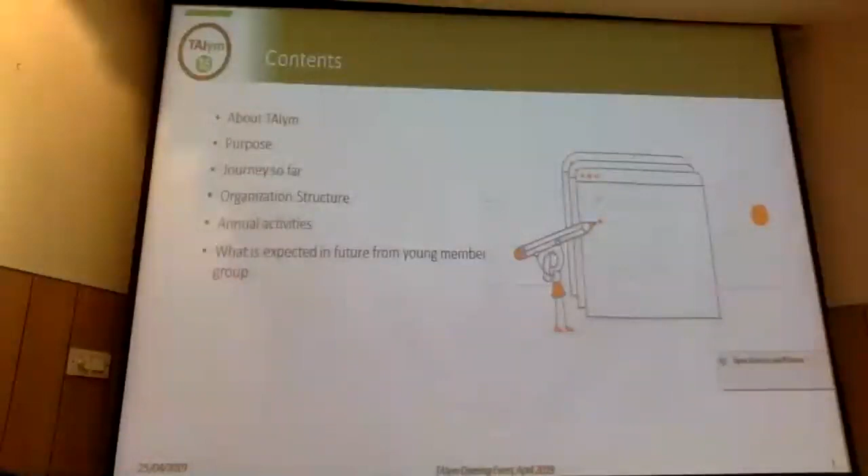In my presentation, I will talk about Tunneling Association of India Young Members Group, its purpose, its journey so far, the organization structure that this group will have, annual activities that we are planning, and what is expected in future from this young tunneling group.

TAIym is a child group of TAI. It's a platform for young professionals, be it engineers, consultants, clients, architects, manufacturers, vendors, or anybody associated with the tunneling field, up to the age of 35 years, working in the industry.

It works in close coordination with the International Tunneling Association and the Young Members Group of the International Tunneling Association. Young members are already making international presence—as far as I know, there are 3 papers from India being presented at the World Tunnel Conference 2019 in Italy this year.

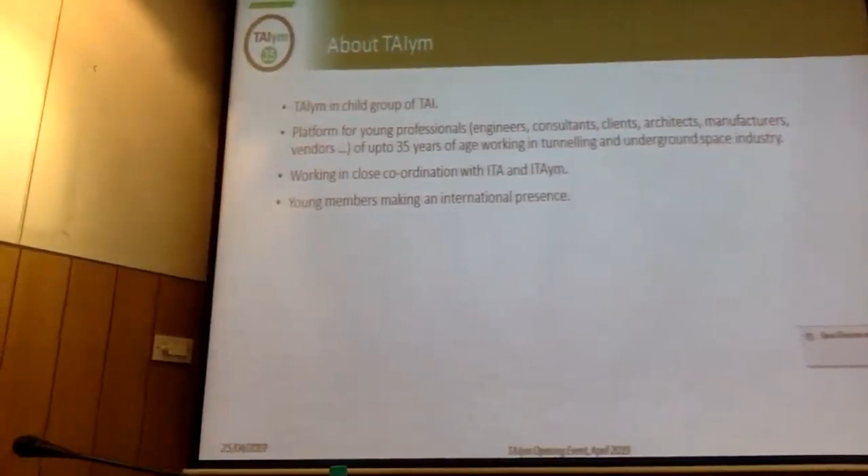Two are from Delhi Metro Rail Corporation, one from Mr. Ujjwal, who is here among us. Another one, I'm not sure about the name, the third one from myself. And we are looking forward to increasing this number as we grow further.

The purpose of the Young Member Group is to explore and motivate young tunneling professionals, give opportunities to interchange and share ideas and motivate each other, provide a space for experienced members of TAI to directly interact with young members and mentor them about the best practices of the tunneling industry, and enable collaboration with national as well as global industries and academic organizations.

Develop management and leadership skills. With assistance of TAI, TAIym promotes writing papers in national as well as international conferences and journals, and promotes recognizing innovations done by young engineers and posting them online. We have a pan-India approach.

Since we are a very big country, once a conference happens at one place, people from the vast majority of India are unable to attend personally. So what we have started from today itself is webcasting all the events that TAIym will do, live on YouTube. Right now it is being webcasted, and the laptop that we see is streaming it live on YouTube.

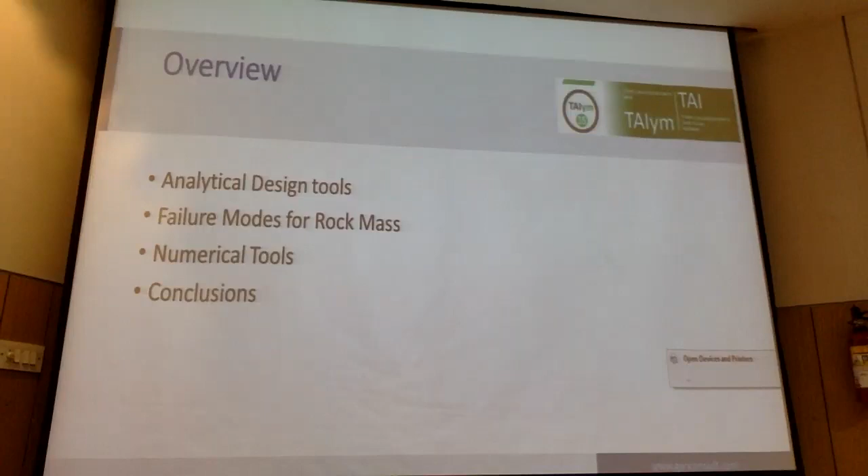So many of you may know these analytical and even graphical tools. There is this Cullmann procedure to assess the earth pressure. Usually people have done it once in their lifetime at the university. You can even make a vector diagram to assess block sliding. Then there are these procedures for assessing slope stability, according to Fröhlich, then Bishop. We have the solution for a circular hole in the plate. We have very quick rock mechanics solutions with stereographic projections.

And then, if we go deeper into the tunneling or into underground openings, we can also manually work on the stress functions, and it's all then differential equations, so a lot of maths.

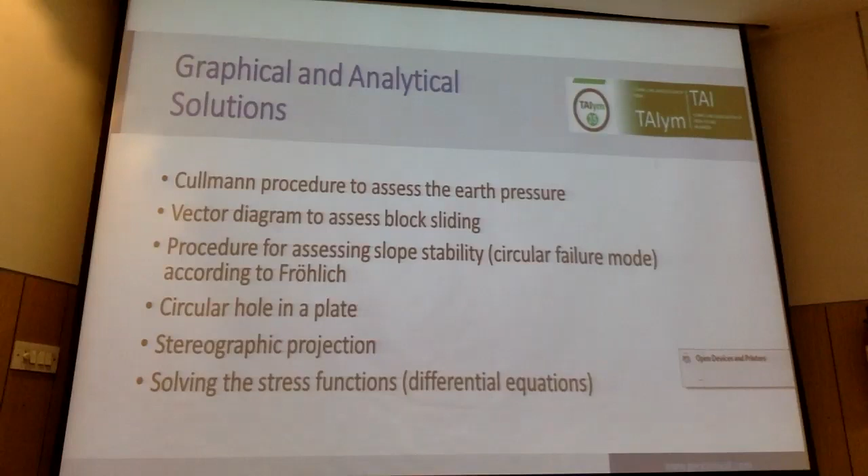Now, one example. Very simple, a sliding block, and what we want is the anchor. So we need to know the weight that we know. We need the angle of the sliding plane that we know. Angle of friction, that is an input parameter with some probability associated. We say that we have no cohesion. We have an angle which the anchor forms with horizontal. So that drawing takes 5 minutes. And if I'm using it on free paper, I have an accuracy of 5%. The accuracy of 5% I don't have for the angle of friction. So this already helps us to get one step in for the first assessment.

Then for our tunnel linings, the first check of a lining load can always be done with this Kessel formula. Whether you take the full overburden, whether you take some other loading, some support pressure you may want to generate to keep the rock mass in place. This takes a few minutes, and then you have some idea what load will be on my lining. Shall I make it thicker? Will it work out? And all these things.

And then it becomes sophisticated, because that already gives me an analytical solution for a circular tunnel. But this solution is even considering a plastic zone around my tunnel. So this is now a bit more work. If I do it manually with a pocket calculator, it will take me a lot of time. If I put it into some software, like MATLAB, it may take me less time, and I can even do some probability studies of what will happen when.

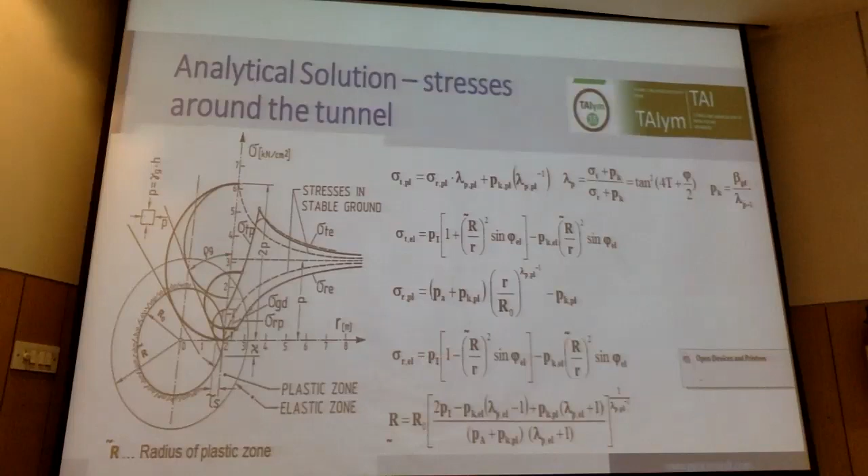Oh, that got a bit shifted. That should not be there. Sorry. Because it should.

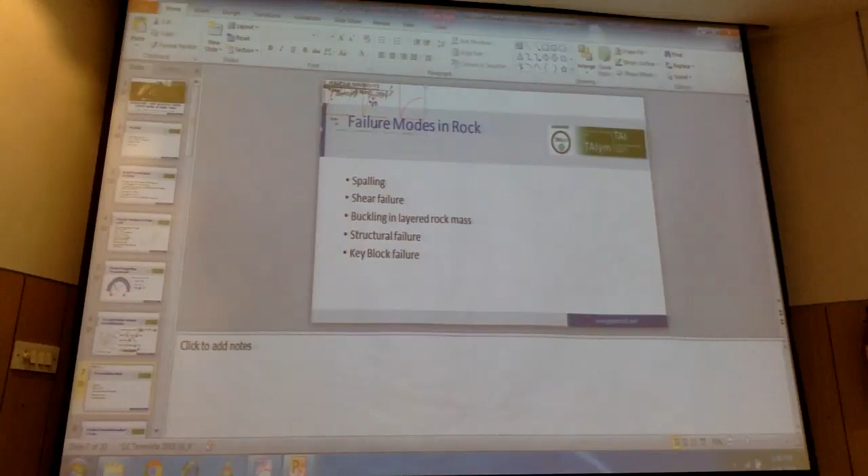Seems to be the one. So, no presentation is risk-free. Ah, that looks better.

This was the very simple design tools we can use for the first check. And then, since we are in tunneling, we are dealing with rock mass.

So what failure modes do we have in rock mass? We have spalling, we have shear failure. In layered rock mass, and in the Himalayas we have it many times that the rock mass is layered, we have buckling. We have structural failure, which is not very common until we come into high overburden, and key block failure, which I will not go further into. It basically means that our joints are in an orientation that the block may fall out of our tunnel crown.

Now, one thing: the depth of the failure will always define my failure mode, because close to my tunnel surface I have no confinement pressure, so I will have spalling. Then if I go deeper, I may have a shear failure, because I have some radial stress here. And if it goes even further, then there would be a structural failure.

Now, the possible beauty of that whole thing is if I'm sketching up a layered rock mass - this time the sketch is for a vertically layered rock mass - I can treat it even like a small column. And if I go further, if I have rock bolts, I'm cutting down this length, so the ratio between the length of the element and the thickness changes.

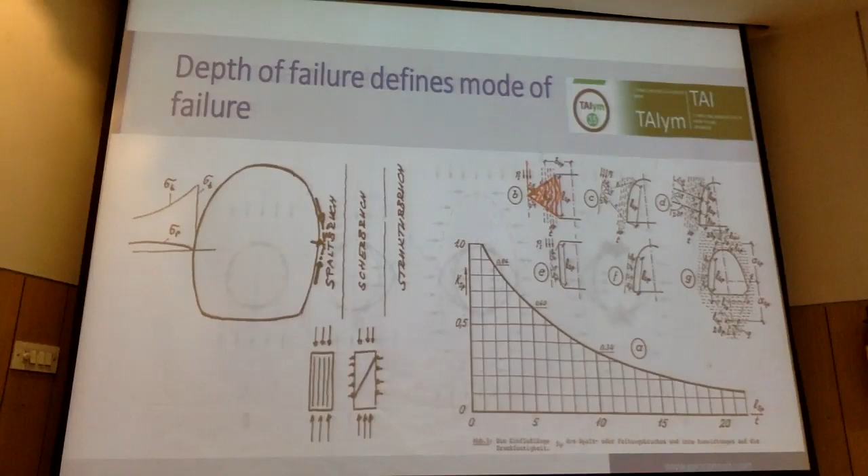Again, one thing that is now not even an analytic thing, it's really just a thinking or a model, is how will a shear failure in a deep tunnel develop. First of all, we have the tunnel in the initial stress state. Then there will be some failure very close to the surface where these jaws would come in, all without any support, naturally. Then once this is there, this whole thing changes again, and the stresses in the ground and in the invert would eventually lead to some upheaving and to some failure in the ground.

And I tell you, this is just a diagram. There are sites where you can really see that, with convergences up to 50 centimeters. And it is very difficult when you make such a sketch to convince the contractor that the rock bolt would be a good idea.

And then the really sophisticated analytical solutions would then be if I have a tunnel and this shear failure occurs, because I will have the first shear failure. If I don't do any measures, then I may get the second shear failure and a huge jaw coming in.

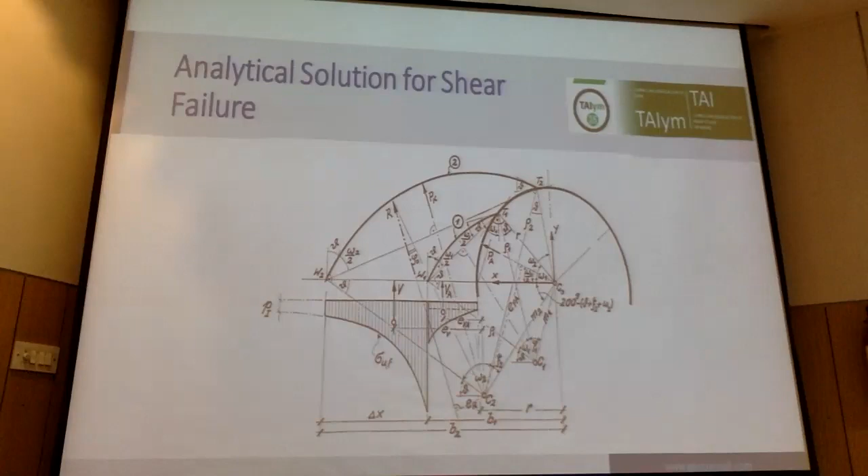Now, what have all these hand solutions in common? First of all, they require some mathematical skills and efforts. They require accuracy in sketching, time and effort for the solving of equations, and also interpreting the results, because you have to go back and forth. And that is common to them: they require a model, as they are all abstractions. It's not something that comes automatically. We have to first model the failure mode, then check it, then go back again.

And they give approximately right answers, because many of them are also based on assumptions like that we have an isotropic half space, especially when you take the normal formulas and diagrams for settlement, which can be used and give a good result, but they are based on an elastic half space. And I think that's the biggest shortcoming for many people: we make one check at a time, but it's not a comprehensive analysis. We take a new page and then we check the next thing, and the next thing. All in all, we will come to a comprehensive analysis if there are no big contradictions, but it's not that we have everything in one go.

Now, what is our latest thing? Since the 70s, we have numerical modeling. So this is the big thing. It's used everywhere. When you are in a metro project, the first question from the general consultant is: do you have a numerical model? And usually you have to do one then.

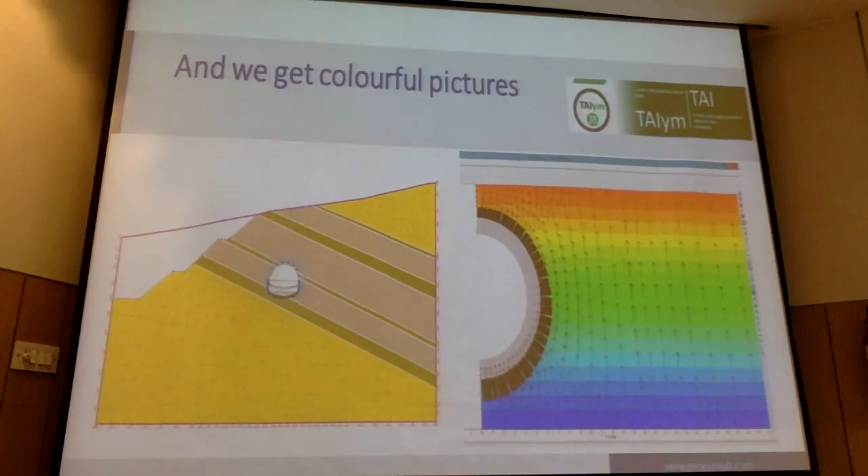Now this is something very interesting, because it shows a D-shaped tunnel and a very sophisticated numerical simulation with distinct elements. But what is the interpretation of that? Who would come to the interpretation that this cross-section is maybe not really the best cross-section for a tunnel? Or will everybody just say, oh, I'm having 5.5 millimeters of displacement?

And this comes a bit more into the range of approximately right, because that's boundary elements, which is elastic, but I know where my stresses will be, and I know it in 3 dimensions. So I can introduce certain features.

Now, as already mentioned by our Vice President, food for thought is even built in here. And that is the first thing: all these very great packages deliver results with many, many decimals, so it looks as if we have an exact solution. And they are very convenient to use.

And we can even model very complicated interactions with interface elements. We have support elements, we can take them out, we can put in the inner lining. All these things can be modeled.

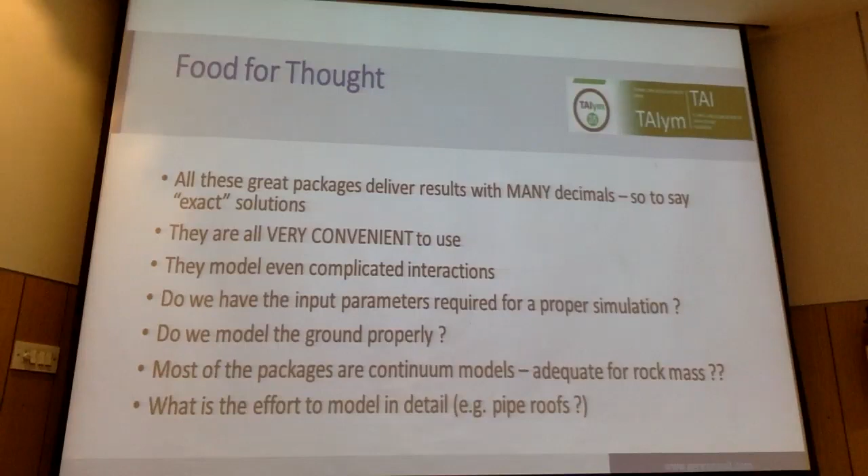And that gives me some ideas which I want to convey. Have a hand sketch first, showing also the geological structures when you're in rock. That gives you some idea what can happen, what can fail, and where is the weak part.

Have a shorthand calculation also. And never ever forget, if you have a 2D model, a plane strain model, it is of infinite length. It is as if you take a tunnel of 1,000 kilometers and you do the top heading. It won't go.

Check your parameter sets, always. And then one thing: angle of friction 19.241 degrees - you read it sometimes in reports, but that is kidding. I'm talking about a natural material where I have a spread of a few degrees.

But I give this example because it comes, for example, from RocLab analysis. I'm having some intact rock strength, some other parameters, and I'm basically doing a patchwork to get some rock mass parameters, and at the end I'm coming out with that. It's somehow a disconnect. So we have to always check our parameter accuracy versus the natural deviation.

And the big question is, if we give 2 decimals, even 1 decimal, and we have in the codes the factor of safety for the angle of friction up to 1.5 - if someone knows statistics, we have a mean value and a standard deviation. If you take standard deviation times 1.5, you cover already quite a good percentage. But it would mean that the mean value and the standard deviation are the same value.

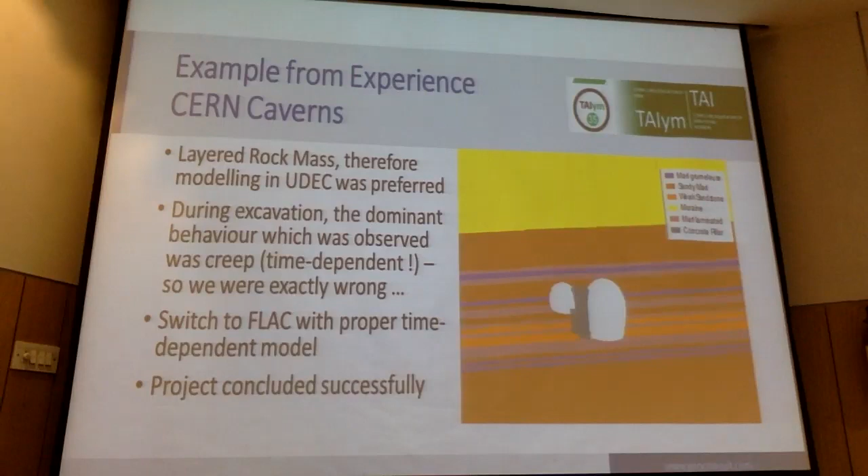So, at the end of the day, we are engineers and not data entry operators. Thanks a lot for your attention.

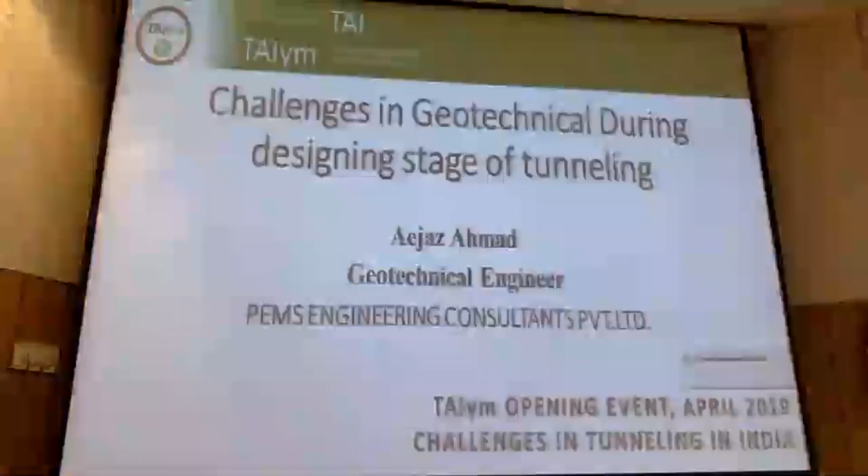Good evening, everyone. My voice is clear? You also have complaints? I'm from Mumbai.

My topic is challenges in geotechnical during the design stage of tunneling. My main emphasis is on the USBRL project, that is the Udhampur Srinagar Baramulla rail link project—what type of problems we faced during the execution of geotechnical and geological investigation.

Before starting my presentation, I just want to quote Palmstrom and Cook. They have written a very good paper. If you get time, you can read this paper.

First of all, the average tunneling progress of 40 to 80 meters per week—this data is from the European Tunneling Association, not from India. A key to high capacity and low cost has been the continuous exchange of experience and close cooperation between engineering geologists, designers, and contractors.

Normally in India, engineers are doing the support system design and all these things. But my suggestion to all the fraternity is, before doing any support system, it's better to always get the geologist at site. First, the geologist will observe the rock class. If he is suggesting something—like if this particular area is forming a bed and he recommends an additional support system—kindly listen to him, because he is a master in geology. If he is suggesting something, it means there is some point.

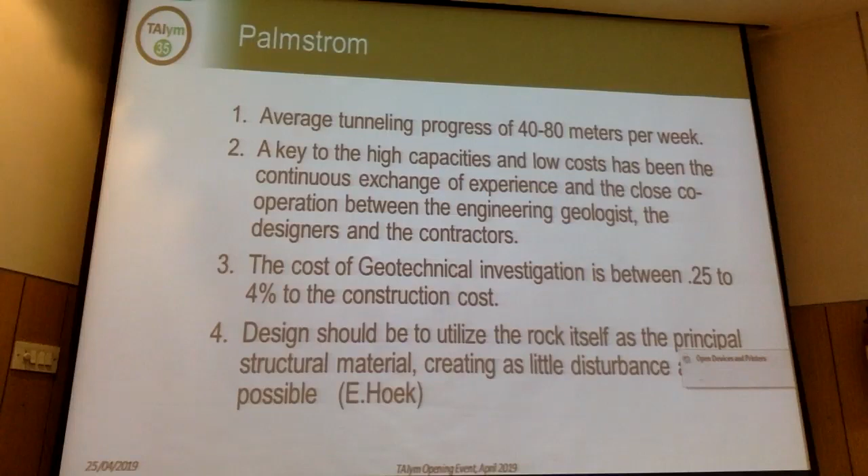Now, what are the challenges we faced during the USBRL project? Number one, insurgency—as all of you know about the insurgency period in Jammu and Kashmir—plus extreme snowfall, high rainfall, and flood.

We have already seen the flood in Kashmir. Landslide—if landslide is present, no vehicle can move in that particular area. So your materials like shotcrete equipment, cement, etc., you cannot move your vehicles.

Varying geology. Why is varying geology very important? Because this USBRL project, the whole project is in the Himalayan terrain. So here the geology, you cannot predict exactly.

Now I'm going to start the design component. What are the design components? Number one, planning the location. First we will plan the location. Then dimension and shape—what will be my tunnel's dimension and shape? Then orientation and layout—what is the excavation procedure?

Excavation procedure means what type of tunneling technology we are going to adopt, either TBM, NATM, or any other. Then excavation procedure, then support selection—what type of support we are adopting. Then finally instrumentation, this is very important.

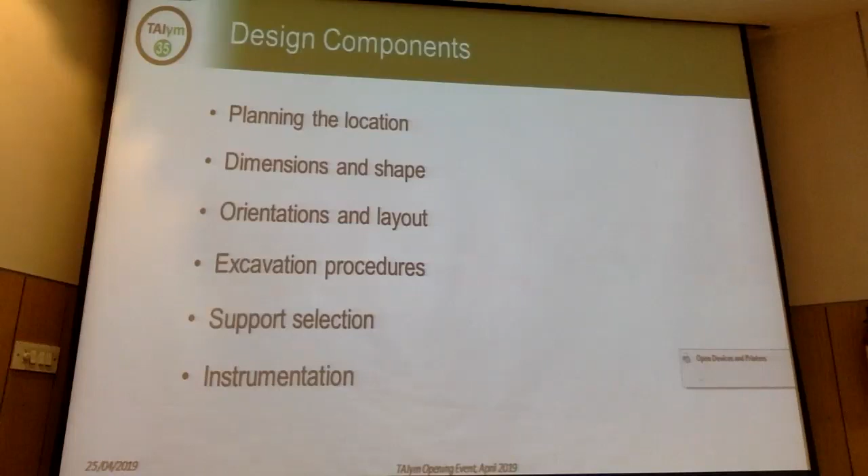Instrumentation in tunneling is very important. Normally we are using 3D monitoring boards, multi-point borehole extensometers, strain gauge meters, pressure cells, etc.

Now the sequencing of geological exploration. I'm not detailing all these things because time is very less, so I'm just reading. Investigation reconnaissance survey—at a glance, we are doing the reconnaissance survey and collecting whatever information we get during it.

Then after that, we are doing the detailed geotechnical investigation. After this geotechnical investigation, when we are exploring and excavating the tunnel, this investigation procedure continues during the execution phase also.

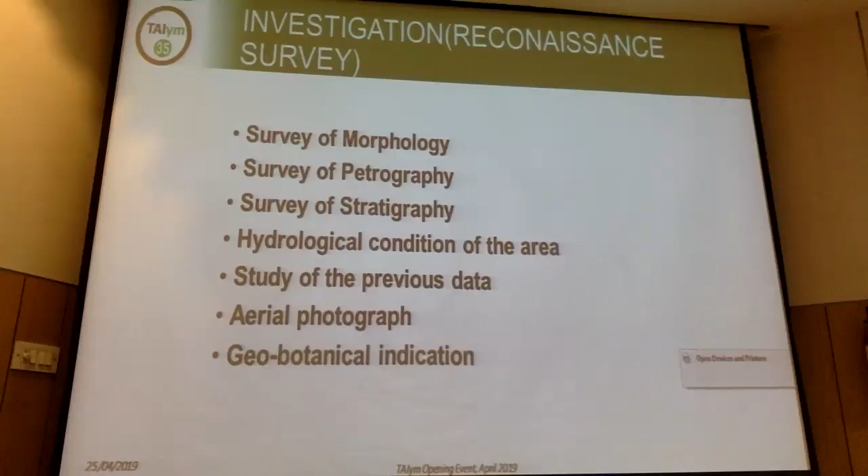During the reconnaissance survey, what are the things we are noticing? Number one, survey of morphology, survey of petrography, stratigraphy of the particular area, hydrological condition of the area, study of previous data if available, aerial photographs, then geobotanical indication.

Then detailed geotechnical investigation—what we are looking at: number one, physical strength of the rock, chemical properties of the rock, what are the fissures, then relative density of the rock, consistency—what is the consistency of the rock.

What particular rock type is in the area, how far it extends—how many meters or kilometers—then dip and strike of the rock bed, study of the faults, number of joint sets present along the alignment, their location, quantity, and chemical composition of the groundwater.

Then geological investigation during the construction phase. The investigation should be continued during construction, not only to check the design data, but also to ascertain whether the driving method adopted is correct or needs to be modified.

Initially, when we are designing, we tell them this particular method has to be adopted. But during construction, if we feel that the initial decision was wrong, we can modify it.

That is why probe holes should be driven in advance and samples studied properly. What is a probe hole? Before excavation, we are doing some probe holes. Why is a probe hole required? To get to know what sort of information we are getting.

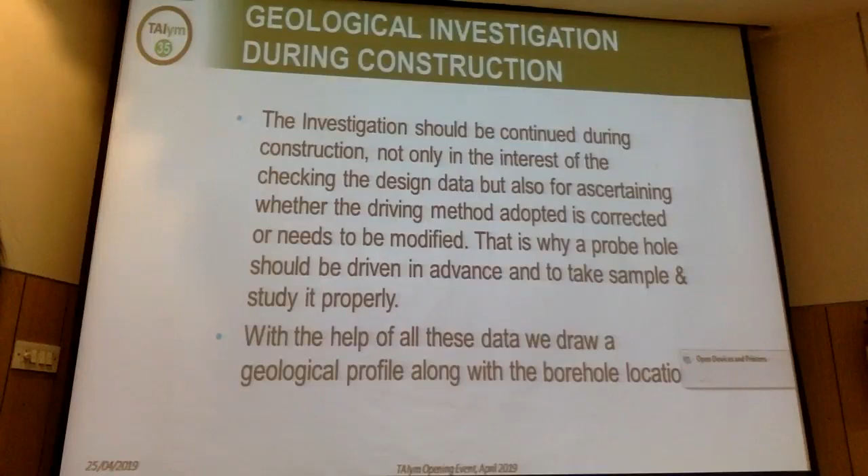With the help of all this data, we draw a geological profile along the boreholes' location. Like this, you can see—this is the geological L-section, showing what type of rock we will encounter during our execution phase. All this data we get after the geotechnical investigation.

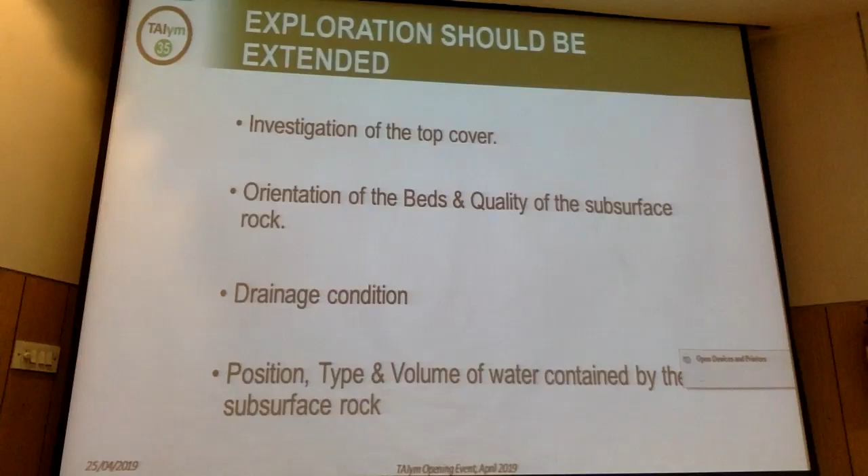Exploration should be extended: number one, investigation of the top cover, orientation of the beds and quality of subsurface rock, drainage condition, position, type, and volume of water contained by the subsurface rock.

Geological exploration comprising the origin and actual condition of the rock—what are all these things we are collecting? We are collecting all this information. Before making this L-section, we are making all these reports and collecting all this data.

Origin and actual condition of the rock, the collection of hydrological data, the data of underground gases and temperature, the determination of physical and mechanical strength of the rock, and geological features.

Detailed investigation requires careful geological consideration and exploration of the geological and hydrological conditions. Mechanized methods have greater rates of progress, but they require more specific data. If we are working on a project like USBRL and local geologists are available, it is very necessary to consult those local geologists. The general path of the tunnel is governed by existing traffic and transport interest.

The exact location is controlled by the geological condition prevailing in the area. An important consideration in selecting the location of the tunnel portal includes design components such as aerial photographs, drilling, geophysical methods, and surface study.

I'll pick up one of these methods, that is drilling. It's a method to collect subsurface data in the form of core samples. The observational items during drilling are core recovery, RQD, and test results of the samples.

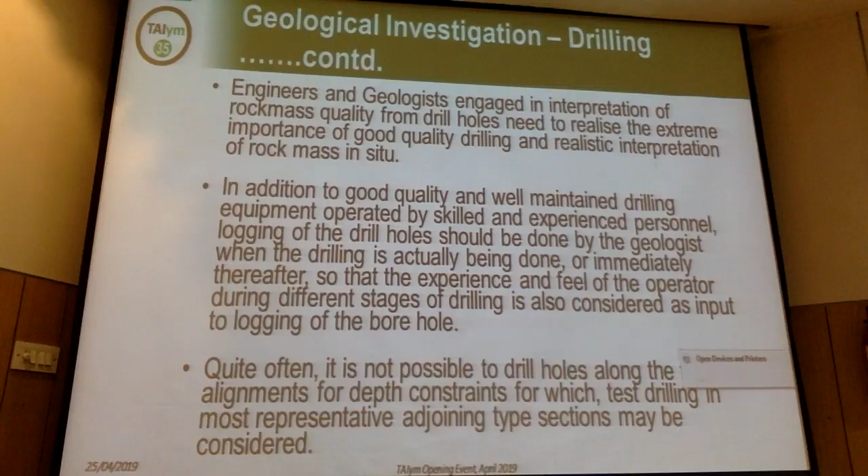Okay, core recovery. How do we calculate core recovery? The simple formula is: length of the core divided by length of the run, multiplied by 100. This is the formula of core recovery.

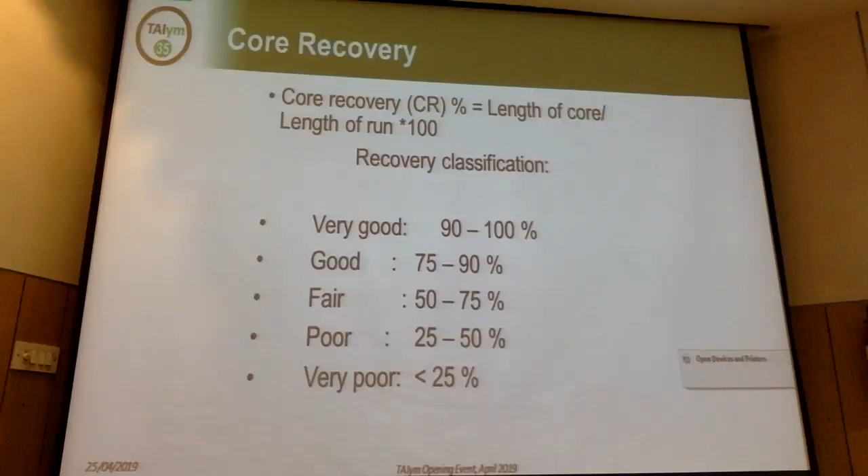Classification of recovery: if you are getting core recovery of 90 to 100%, it means it is very good. If it is less than 25%, it is very poor. Rock quality designation, or RQD, is similar.

RQD measures the degree of fractureness, joints, and discontinuities of the rock mass. The formula is the sum of the pieces whose length is greater than 10 cm, divided by the total core run. If your RQD is less than 25, it is very poor, and if your RQD is between 90 to 100, it is excellent. This is the process for calculation of RQD.

Like this is my core sample. So, the lengths where we are getting pieces more than 10 centimeters are 38 centimeters, 17 centimeters, 20 centimeters, and 35 centimeters total. So we add 38 plus 17 plus 20 plus 35, divided by the total length of the core run, which is 200, multiplied by 100 — that gives us 55% as the RQD.

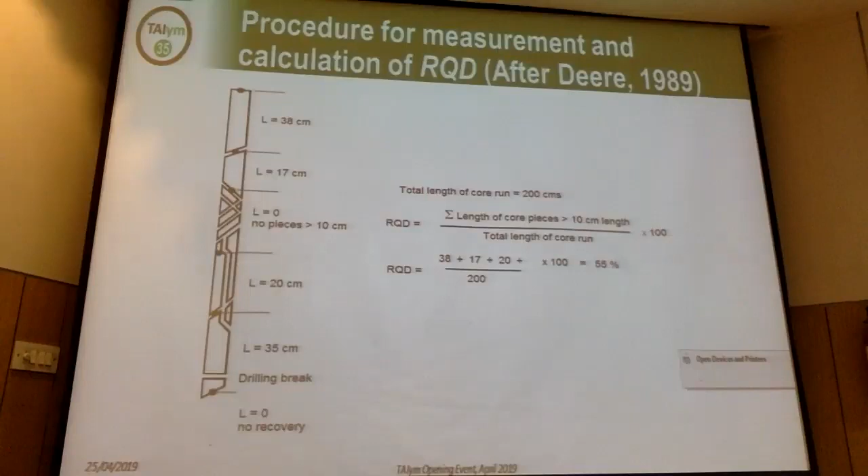These are the rock samples we encountered in the USBRL project.

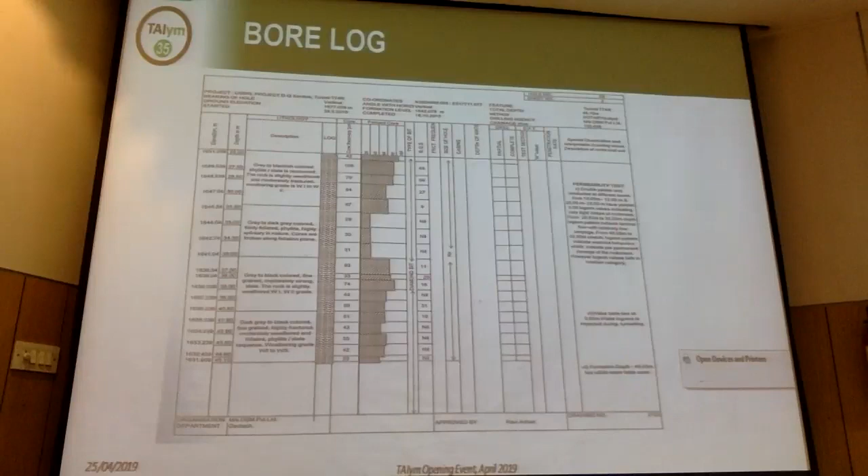After this, we are preparing this type of bore log, showing the lithology, different types of RQD, fracture frequency, size of the hole, casing, etc. Then there's the influence of geological features in the tunnel, such as rock types, stratigraphy of the area, fold, fault, joint, weathering, and karst topography. These all affect the tunneling procedure.

Geological investigation's main purpose is preparation of the DPR. During the DPR stage, we do this geological exploration and investigation, and after the DPR, we also do detailed investigation.

Geological data information is collected through old literature, satellite imagery, and aerial photographs of the regional setup. Site geological data is collected through geological mapping, subsurface exploration through drilling, and geophysical surveys, besides the geological setting along the tunnel is made from remote projections that at best are approximate.

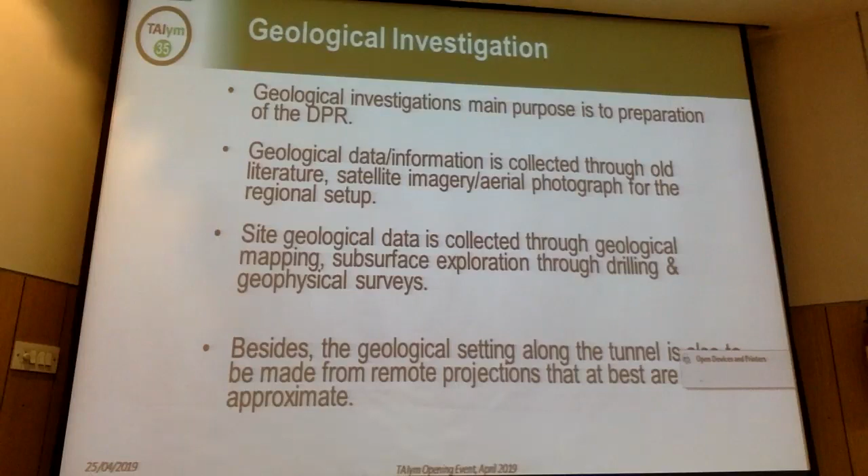Lack of proper access, like paths, during surveys and investigation is a problem we faced. What are the problems we faced in USBRL? Like there is no path. So how do we have to go into that particular area? Definitely you have to walk for this surface mapping and exploration purpose.

It is prudent to spend unreserved efforts and money in developing additional paths and access, particularly covering major rock exposures and reaches of geological significance. It is a difficult and time-consuming task, but the extreme importance of such mapping for proper layout, design, and construction of underground works like tunnels makes it imperative that this work is done at the survey and investigation stage.

So my main point is, if you do your detailed geotechnical investigation during the design stage, then you will avoid geological surprises. You will not get as many geological surprises as you would without this detailed geotechnical investigation.

The pilot tunnels in underground works. Neo-tectonic activities—the movement on faults disrupt the tunnels and its lining, may cause offsetting of the tunnel itself. The sudden release of stresses may disrupt everything, including the support. In the belt that intersects numerous faults, there is the possibility of movement taking place.

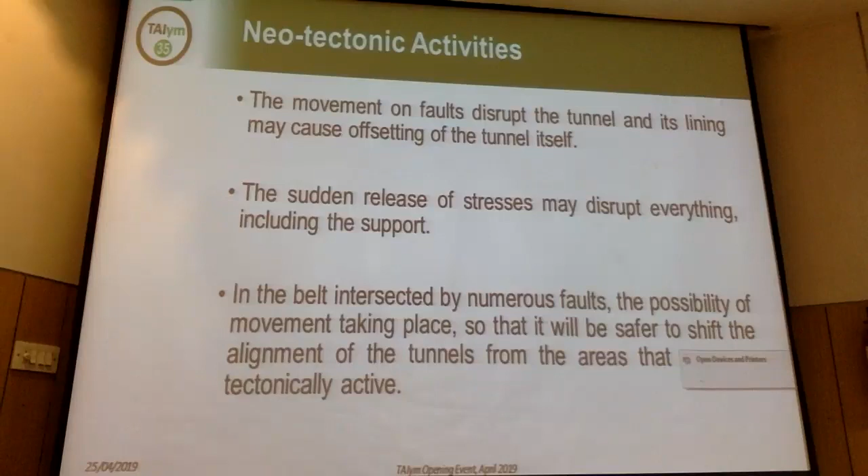So if we are working in an active fault zone, we have to consider the stresses in that particular area. A good engineering design is a balanced design in which all the factors which interact, even those which cannot be quantified, are taken into account. The duty of the design engineer is not to compute accurately, but to judge soundly.

In conclusion: on the basis of the data collected, appropriate excavation and support systems are to be designed, and infrastructure is to be developed for taking care of any special geological occurrences that are anticipated. Second, changes in design necessitated during construction are a main cause of cost escalation and sometimes time overrun. Third, proper planning and identification of all construction equipment and methodology of construction are to be involved during the DPR stage.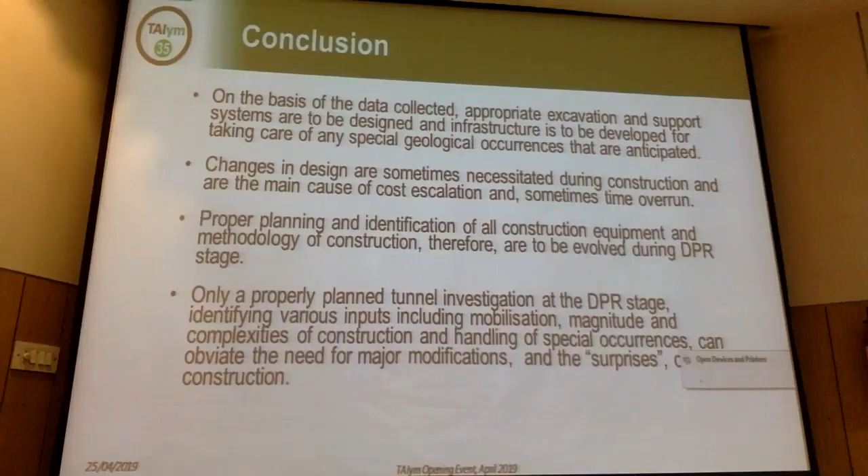Finally, only properly planned tunnel investigation at the DPR stage, identifying various inputs including mobilisation, magnitude, complexity of construction, and handling special occurrences, can obviate the need for major modifications and surprises during construction. Thank you.

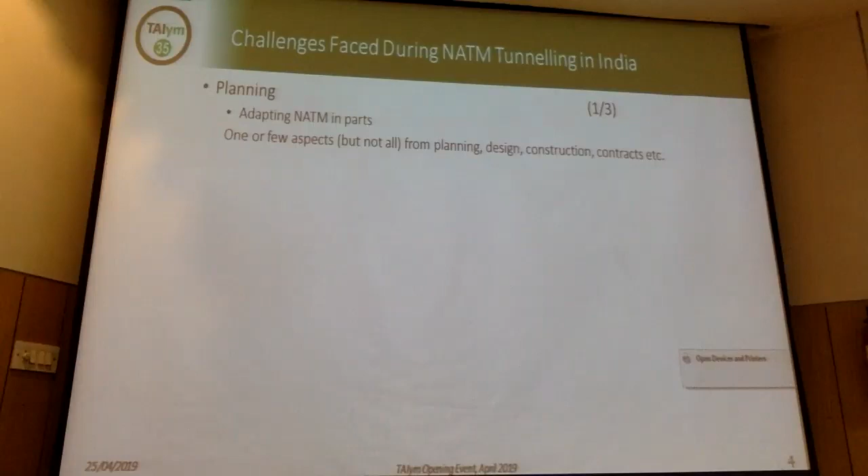Either you are doing your design by NATM or your contract by NATM or planning, but you are not adopting it in its totality. The thing with NATM is that when you adopt it in its totality, it works like a well-oiled machine, so that all aspects complement each other, whether the design also you do as per the NATM, then your contract is also based on that. So you can get maximum benefit out of it. It is a start-to-end process from the idea to the construction, and everything has to be adopted in totality to reap its maximum benefits.

Let's say in planning, if you have a chaotic project organization structure, which we see at times in some projects, where there are too many players in the project to take decisions, and there is only one responsible party which has to okay everything. So there is too much burden on that party, and there is not much accountability and responsibility for other parties involved, and that inevitably leads to delays.

Not just in NATM tunneling, in any tunneling projects, time is a very crucial aspect when it comes to a problem. If you are faced with a problem, you have to make quick decisions, otherwise the problem compounds and becomes a bigger problem.

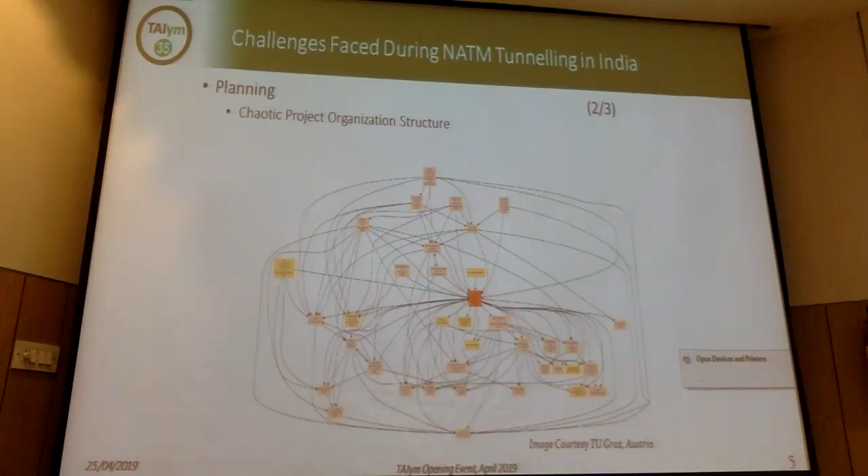NATM loosely defines a structure where there is a client, which is the owner of the project, then there is a designer, there is a site supervision or engineer, whatever you call it, and there is a contractor. These are the main parties, and there are other parties also, but these are the main parties which have very clearly defined roles.

The contractor has to report to the engineer, and he has nothing to do with the client directly. So the engineer has to handle the whole project, whether it is design issues with the designer or with the contractor, and in the end, the engineer reports to the client. In that way, it is a bit more sorted project structure where your execution is better.

Another aspect with respect to contracts is that NATM is most suitable when it is a unit rate contract, not a lump sum contract. But when you have a lump sum contract, you have to complete your project in a pre-decided cost.

For example, let's say at the tender stage you have some geology based on whatever geological investigation you have done, and I'm not saying that you have done it less. Let's see, for this example, there have been large horizontal drilling as well as inclined drilling which you have done, and you have made a geological model at the tender stage by which you are asking your bidder to prepare a bid. But when you are actually excavating, it could be that you encounter something else, because it's certainly not possible in every project, especially when we talk about Himalayas, to do that much extent of investigation where you know everything, which is not feasible also financially.

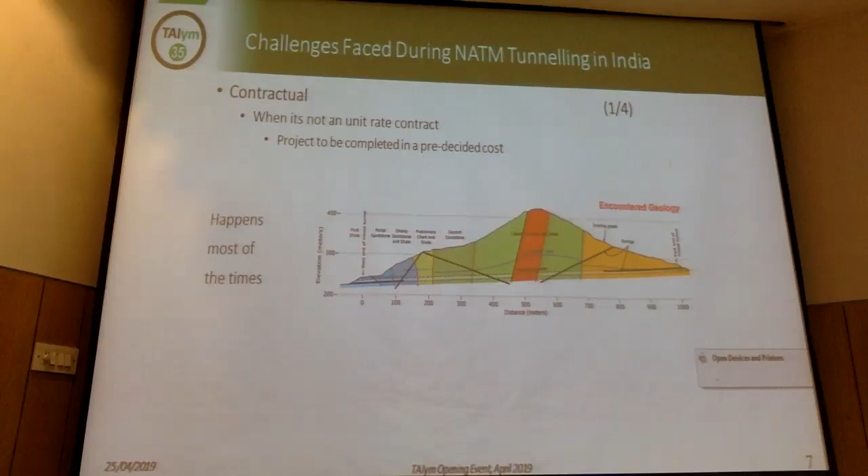But this is actually expected most of the times, which happens most of the times. And if you don't give room to the contractor, then he has to finish the job in the pre-decided lump sum amount, but actual cost may vary in either direction. The geology could be better than what you predicted, or the geology could be worse than what you predicted. In either case, the price may vary.

But if you have a lump sum contract, then certainly the contractor is not there to do charity. So he will try to somehow propose a claim or pose some delays to the project, and then everything becomes lengthy, and in tunneling, time is money.

As I said, NATM is more suited to unit rate contracts. Ground risk is always with the client in NATM, because if you are constructing a tunnel, then whatever the ground risks are, they are with the client, and the contractor is responsible for the risk and safety of the project. Contractor has to ensure the rate of excavation as per the contract.

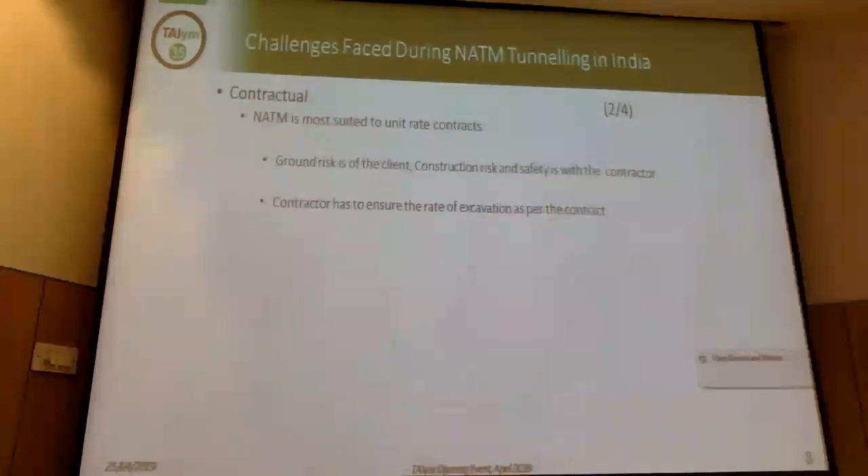In NATM contracts, every contractor provides the rate of excavation in any specific geology or in any specific tunneling class. So even if the extent of that criteria extends or becomes less, then also you can play with the rate, and your cost of the project is always variable based on whatever geology you encounter.

Another problem which is faced quite regularly is that in the contract, payment terms are as per the rock classification systems. When writing a contract, if you have written that payment to the contractor will be as per the geology encountered, this becomes a regular problem at site. Why? Because geology is always qualitative.

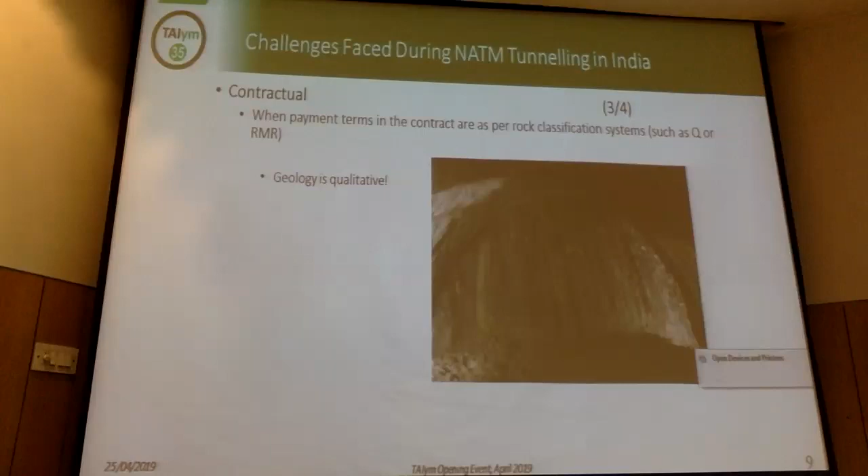Let's say there is a tunnel face, and one guy is the client's geologist, and another is the contractor's geologist. If the client geologist tries to find the geology of this face based on Q or RMR, which is a qualitative system, he calculates it with the fixed parameters he has and concludes it's a class 2 rock. But the contractor's geologist could have a different view and, playing with the parameters, could reach a point where he says it's a class 3.

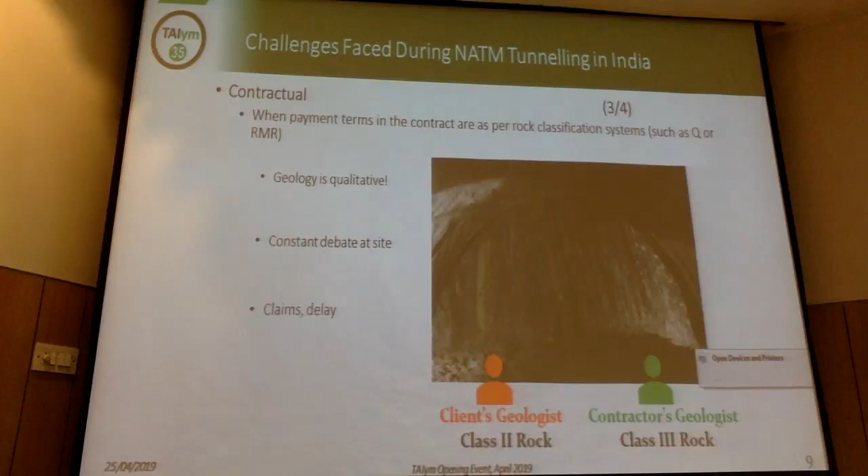The client geologist wants to save money for the client, so he will try to keep it in as lower a rock class as possible, whereas the contractor's geologist will try to keep it in the upper class. This makes a constant debate at site, and in the end you cannot prove anybody wrong, because between class 2, class 3, or class 4, there isn't much difference if somebody wants to argue it. This constant debate at site causes claims and delays and hampers your project. Whereas in NATM contract, payment terms are as per tunneling class.

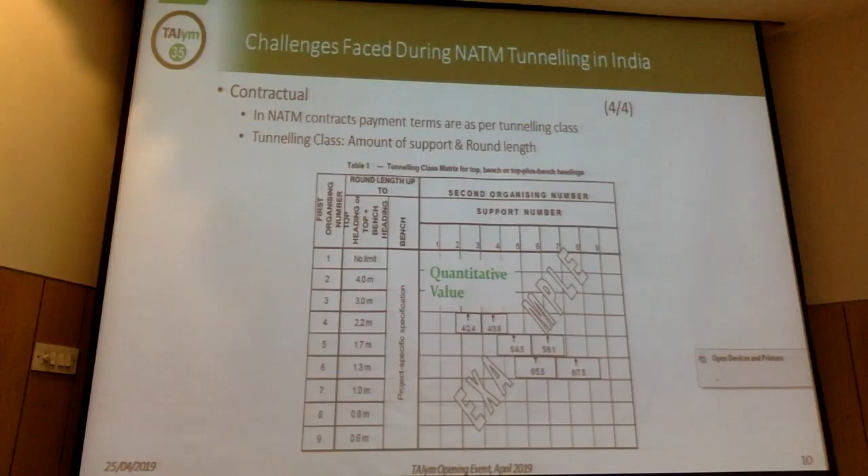Tunneling class is basically the amount of support you put in a tunnel along with the round length. These two are quantitative things. If your geology is poor, you either increase the support, or reduce the round length, or do both. In any case, the tunneling class calculated will be the same for both the contractor's person and the client's or engineer's person. It's a quantitative value which cannot change during construction in a tunnel. So whatever you do, in the end you reach a point where there is no debate, because it's a quantitative value.

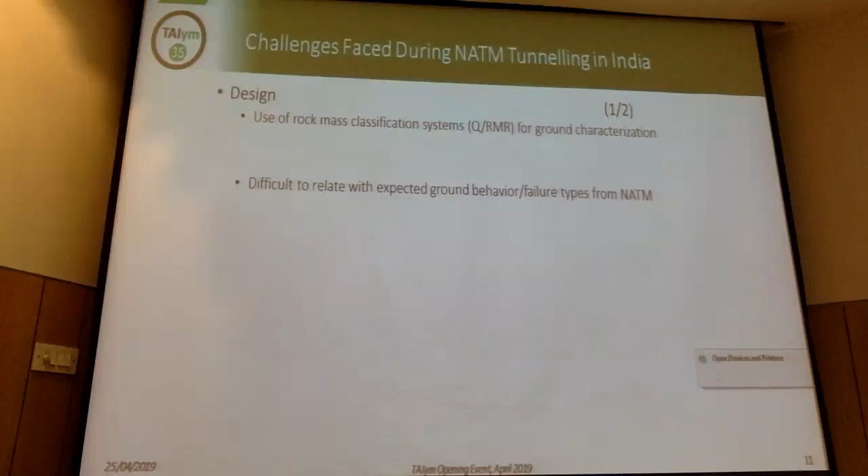When it comes to design, this also causes a problem. When you have rock mass classification based on Q or RMR type systems, it becomes difficult to relate the expected ground behavior to the behavior type mentioned in NATM. In Q there are certain ranges for good, bad, poor, or very poor, and similarly RMR has different classes, whereas NATM has 11 behavior types you might encounter while tunneling. If your contract says you have to classify as per Q or RMR, then in design you don't know whether your 'extremely good' falls under stable, shallow failure, or discontinuity-based failure. This one-to-one comparison can change, creating confusion at site.

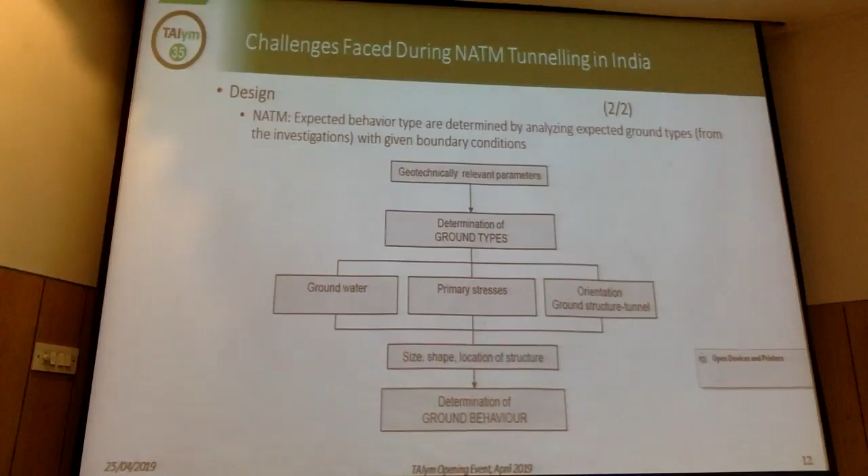In NATM, you define behavior types, not rock mass classes, based on whatever parameters you have arrived at. Then, based on the ground parameters with respect to the tunnel, you arrive at the expected ground behavior.

When it comes to instrumentation and monitoring, intermittent interpretation of monitoring data is a big problem. In tunneling, the interpretation of instrumentation data has to be continuous. If you do intermittent evaluation, you are weakening a major pillar of NATM tunneling. Let me explain with a small example.

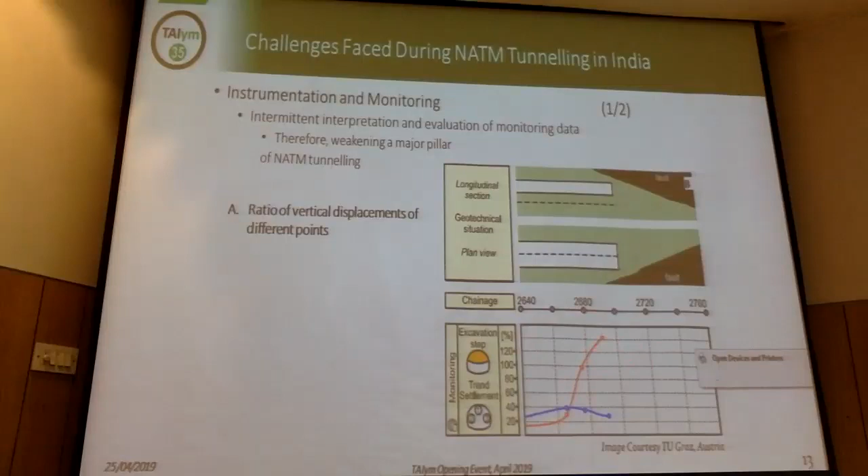Similarly, when you reach the fault, even before completely entering it, from interpretation of the model you can more or less guess what you're going to expect, and you can be ready for related problems, such as optical targets getting damaged nearby.

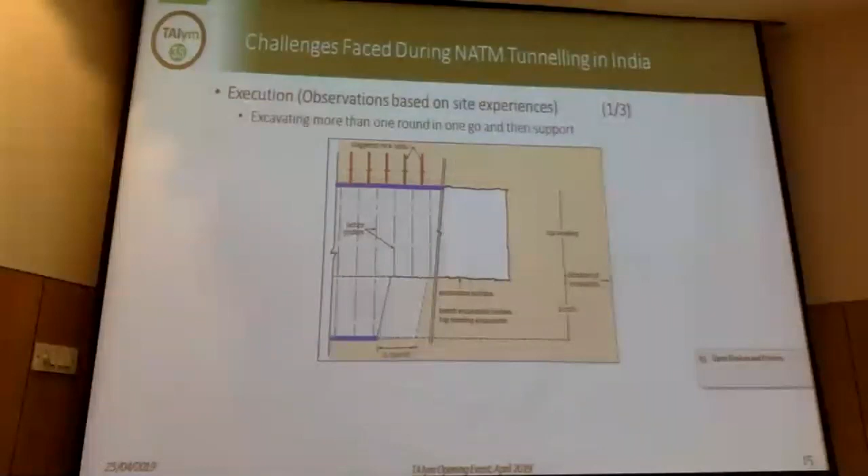In execution, there are some experiences we have where contractors excavate many rounds and then put the support, which certainly doesn't go well with stability.

Elephant footing is sometimes chopped away while benching, which is also not good. Doing away with sealing shotcrete is certainly one of the things which is not good.

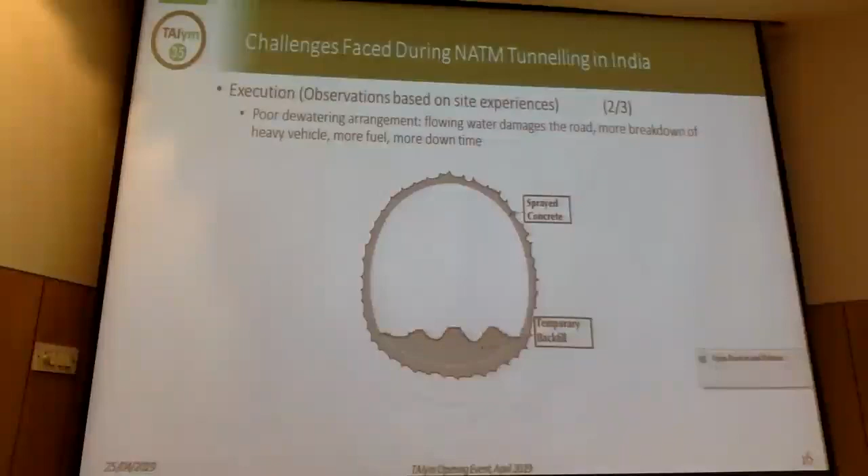The last point, which is educational, is that tunneling, NATM or others, has not been penetrative in the Indian education system as of yet. Very few institutes offer tunneling related courses, and most of those courses are elementary and lack industrial experience.

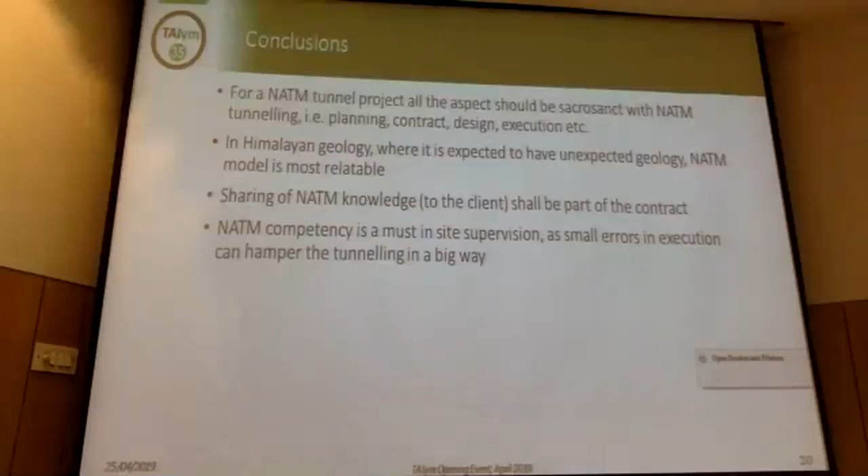Many government clients do not have tunneling competency, and that's not their fault. Therefore, quick decision making is essential with NATM tunneling in Himalayan geology, and small errors could hamper the tunneling in a big way. Risk sharing is the way forward for any successful tunneling project.

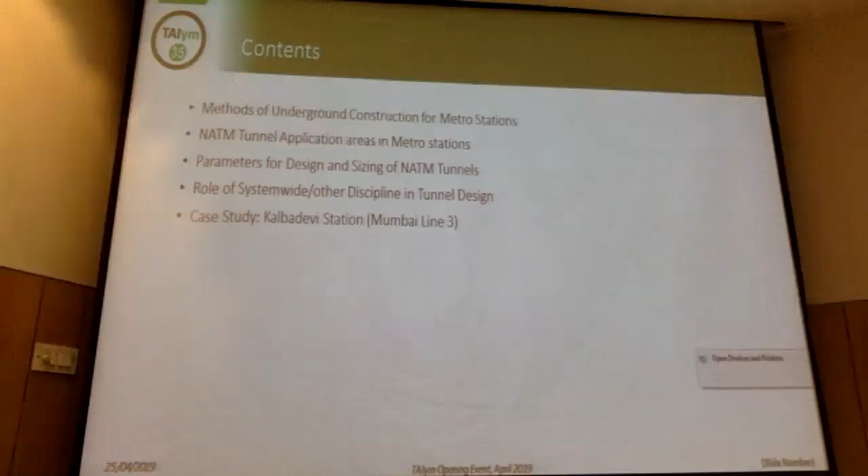The contents are basically methods of underground construction for metro stations, NATM tunnel application areas in metro stations, parameters for design and sizing of NATM tunnels. Now, these parameters are primarily the inner profiling of the tunnel and not the envelope. Then we have the role of system-wide and other disciplines in tunnel design.

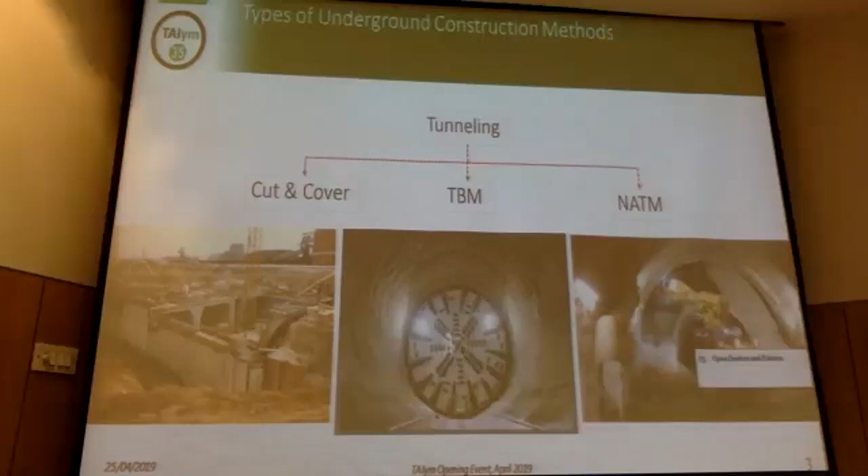And last is the case study of a station in Mumbai, which is Kalbadevi. It is an upcoming station, still under construction. The types of underground construction methods, specifically for tunneling, are cut and cover, TBM and NATM, which all of us are aware of. Out of that, I'll be focusing on the NATM part.

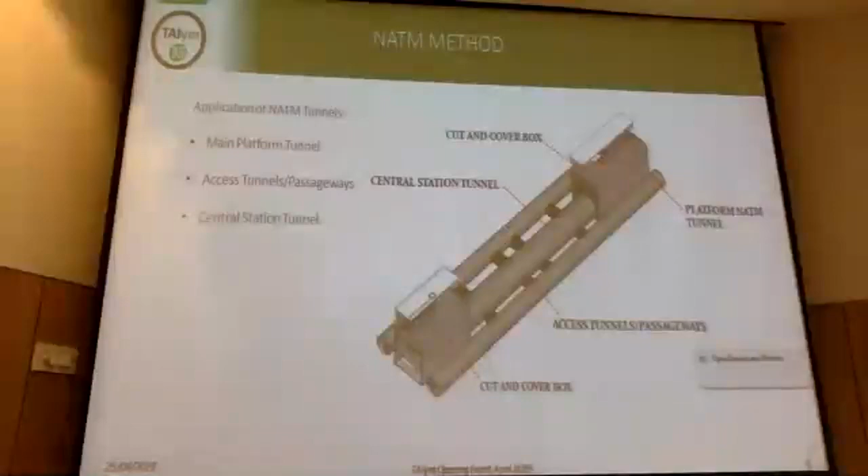In the NATM method, the applications of NATM tunnels are: we have a main tunnel, which is the platform tunnel; then we have the access ways, the access passageways, which are the connecting tunnels to the main platform tunnel; and then we have the central station tunnel.

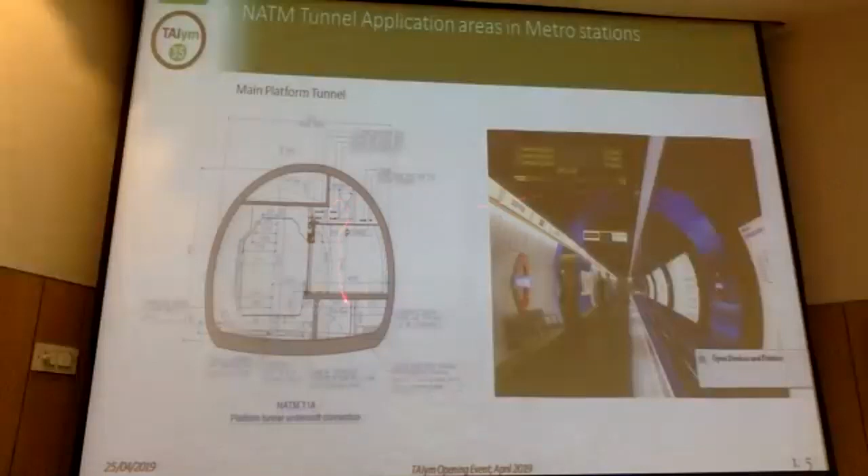So we have all these things coming over the wall and ceiling. It's not quite this profile, which it might be, but we do have some height reduction due to things coming over this, and we have a big obstruction which is the PSD, which comes right here.

Next is the access tunnel or the passageways. We have divided these into two kinds, because we need to have some connections.

This kind of passageway is the one where we want to connect it with the undercroft also of the station. We want to take some services below, and transfer those from the tunnel portion, from the track side, to the undercroft of the station. This kind of section is where we do not require those connections, so we would want to have a smaller profile there.

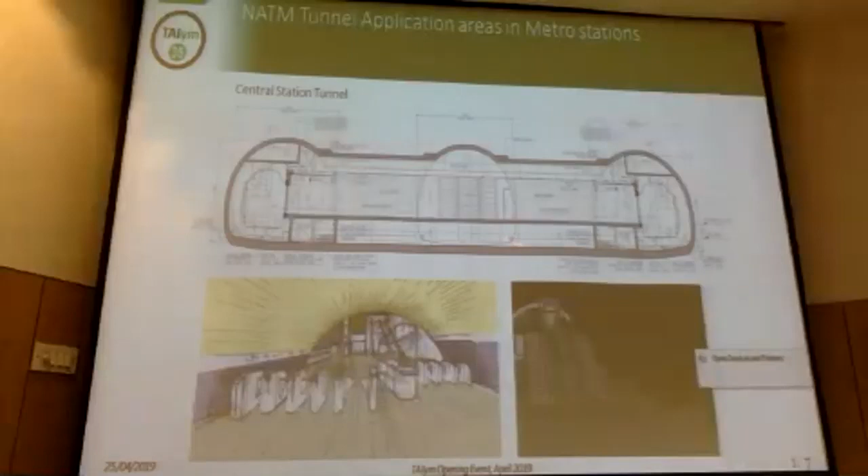Now this is the central tunnel, where this portion is also a tunnel in the center, having a main vertical transportation element for the station. So it houses basically the stairs and escalators, which will be leading to the concourse of the station. It is a combination of all three kinds: the platform tunnel, the access passageway, and the central tunnel.

Now, the parameters for design - this is a typical section which we have.

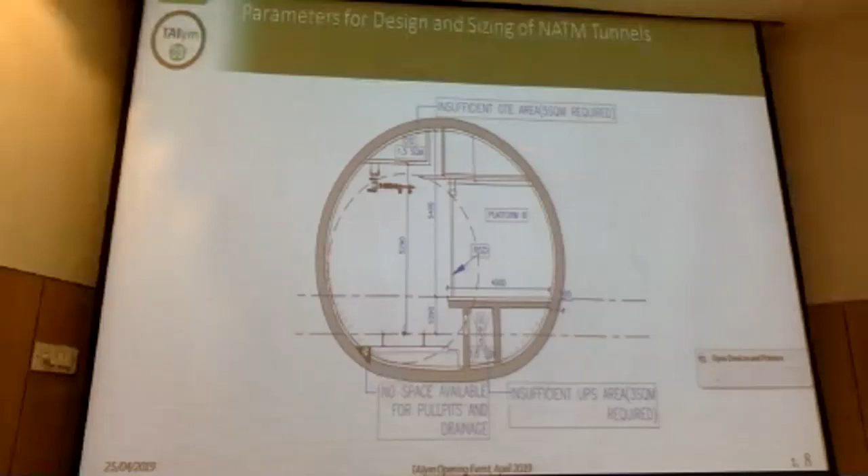The difficulty with this kind of section is that we start with this fixed structural outline of the tunnel, and then we try to fit in the other things we require. So we get ventilation ducts, the over-track exhaust and platform exhaust, both with particular sizing, and we have to arrange that.

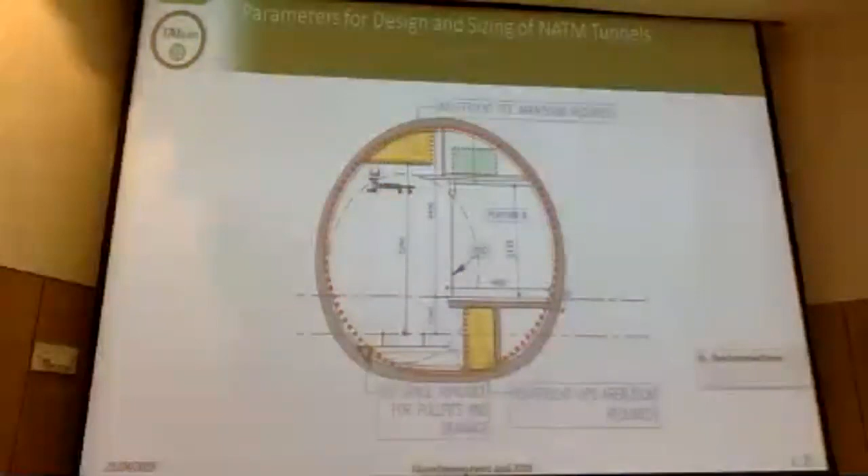Then we have the elements for the platform, which is the station supply and exhaust. We also have the false ceiling and other profiles. We have the lighting, signages, and everything else that comes in.

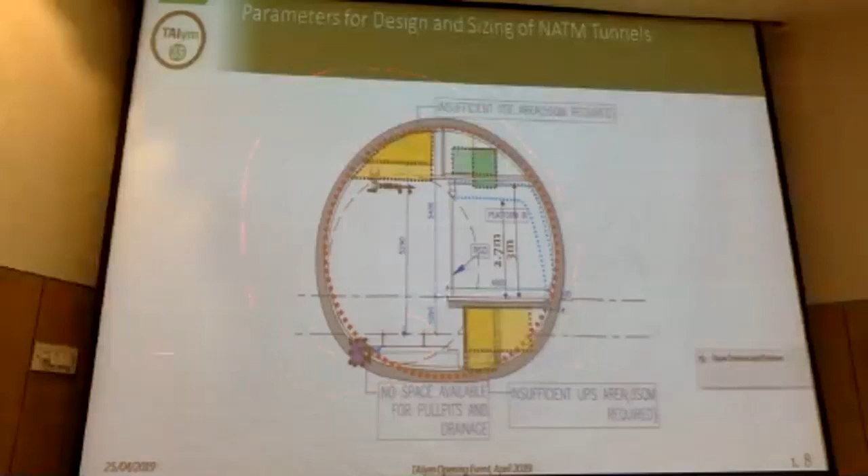Then what we start doing is try to modify those things. We try to enlarge this, bring this ceiling down, try to increase this. But as we see, this is not working. The profile given to us is not working and nothing fits in. We do not get the drainage here, we do not get pull pits, which is important for transferring the cables. So this kind of section, though it looks very nice, is not working in terms of functionality. So then we have another approach.

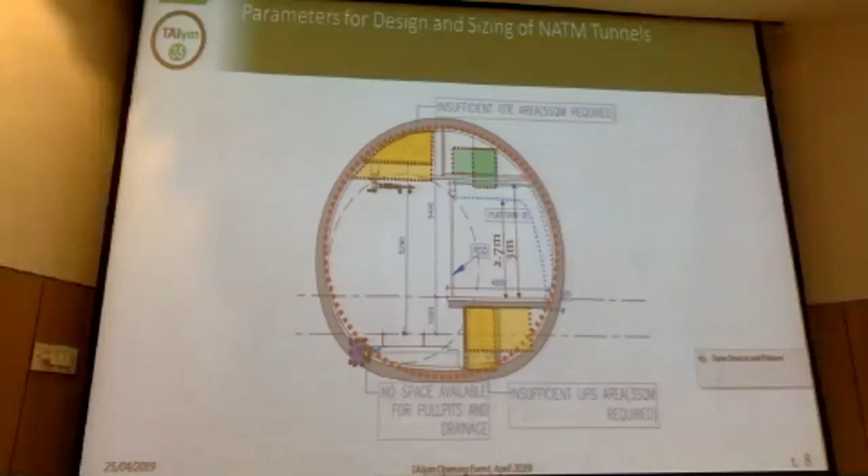This approach we can also adopt if we are ready to have some innovations, ready to optimize other solutions, and have time to research creating new solutions which are not the standard traditional ones, and it can be designed.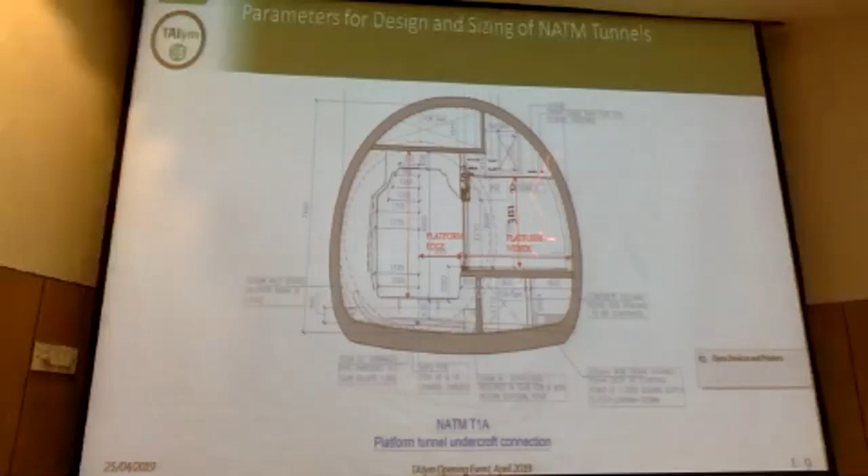We come to another approach where we have this fixed criteria, which is the platform edge. The track center line and platform edge is fixed as per the schedule of dimensions. Also the platform width is fixed since we have done the sizing calculation for this element. Then we have the height we require, because we do not want to feel claustrophobic in a station, so we want a particular false ceiling height. Then this dimension, rail level to the bottom of the OTE, is also fixed, provided in the ODC, the outline design criteria, and also in the schedule of dimensions. So all these are fixed.

Plus we know we will have cables to transfer, and certain drainage to transfer from one side of the track to the other. We also know there is an area requirement already provided in the design criteria. So we have these elements, and we get certain extents for designing the envelope — that is the duct for the station supply. So we get an outline of how we would want the tunnel profile to be.

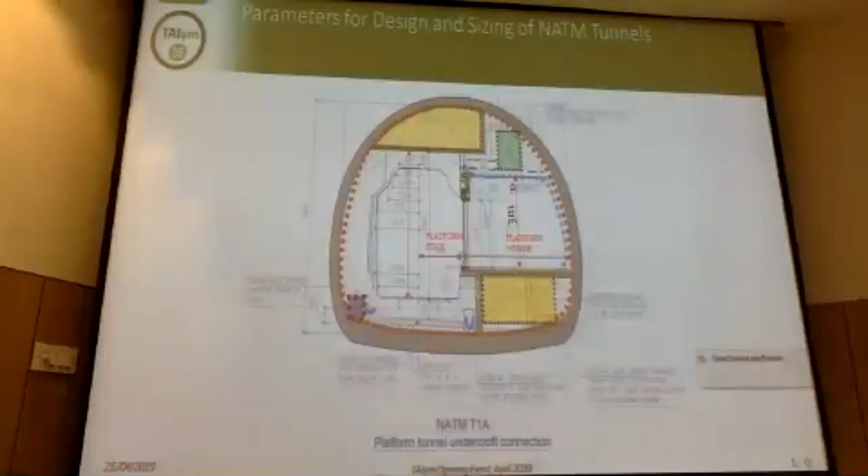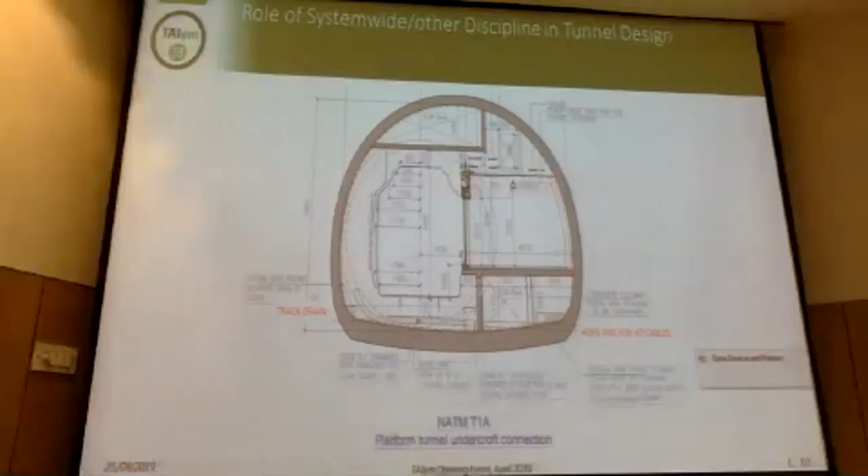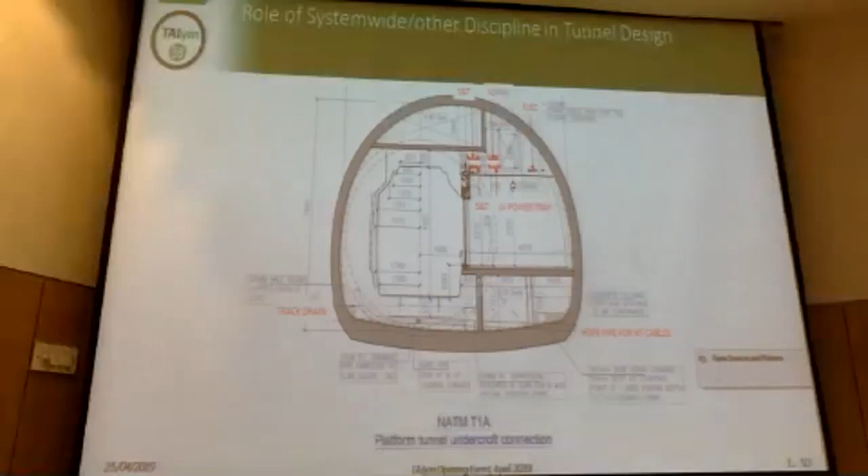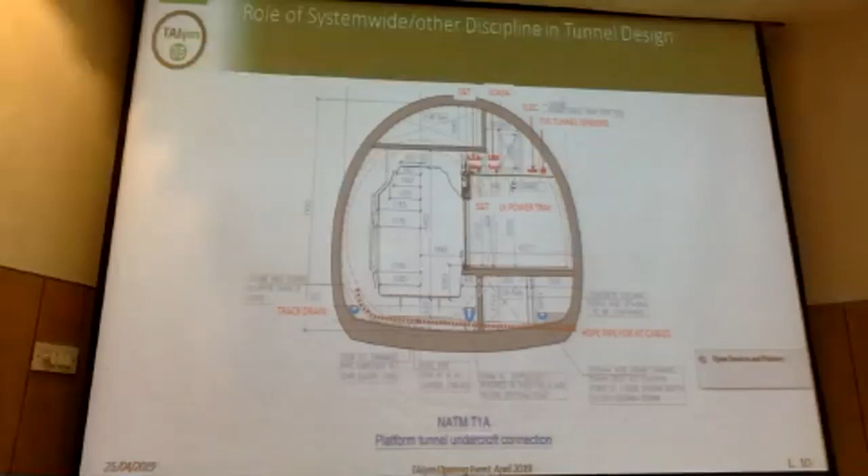Now the role of system-wide and other disciplines. Other than architects, structural engineers and services, we have system-wide input too, with their services running in the tunnels. We have S&T, signaling and telecom, power cable trays, LT cables, SCADA for mechanical and electrical, electrical cables for lighting and signages, and TVS tunnel sensors. Then we have general electrical and plumbing, called the station. So we have all these services in tunnel design to consider while designing the interiors of the tunnel, and it is more important for deciding the size and height of the tunnel.

Now we go to a case study of Kalbadevi station. If you've been to Mumbai, you will know this is a very crowded area, particularly Kalbadevi and Girgaon are very crowded, and we have very little space for construction at site there.

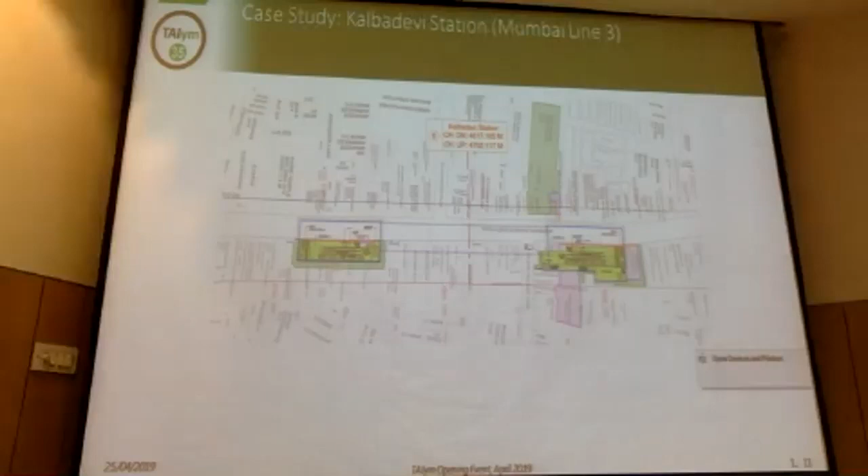So we have this station which is partly cut and cover, and it has all three kinds of NATM tunnels. The size of this, if you see, is just 10 meters by 49 meters, and the overall cut and cover box that we have is 20 meters by 50 meters. So we have two cut and cover boxes of that size.

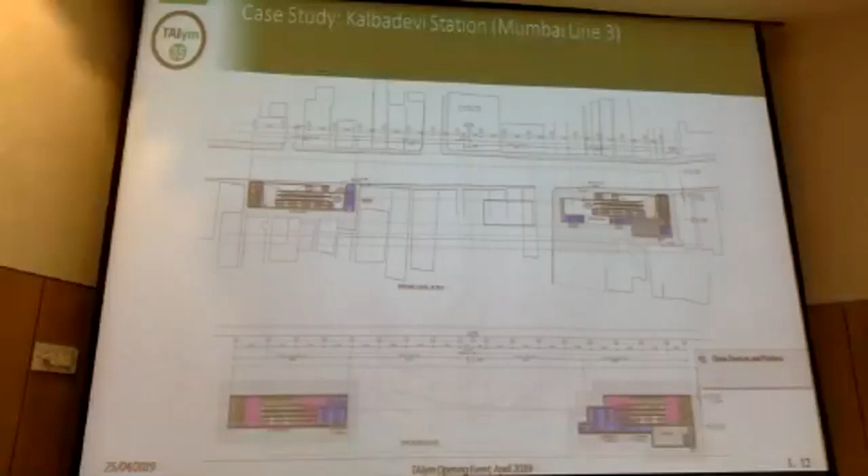Then we have a connecting tunnel below. So we have our entry elements, vertical transportation elements going from both sides, two accesses. And this is what we see if we go down. We have two separate boxes, which is the mezzanine level, where we have all the services, the AHUs, and all those things housed in this area.

Then we have a concourse, which is this portion that is a cut and cover. This is a deck which extends to the central NATM station NATM, but we do not have a connection between the two - there is no opening. Then if you go to the platform, you can clearly see that this is my platform tunnel, these are my cross passages, and this is my central station tunnel and my connection with the cut and cover box. So if you go to the section, this is the typical section through the cut and cover area.

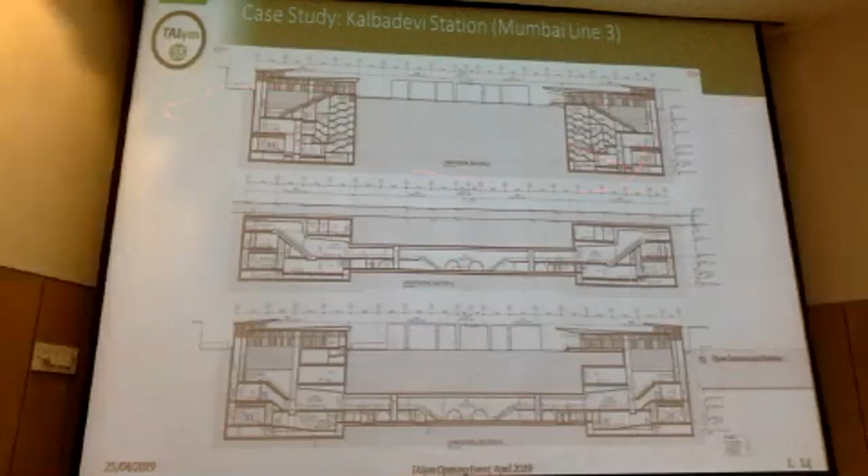Then we have a connection with the central NATM, and we have a double height space in between - that's a huge space in between. But we do have a deck in the central tunnel.

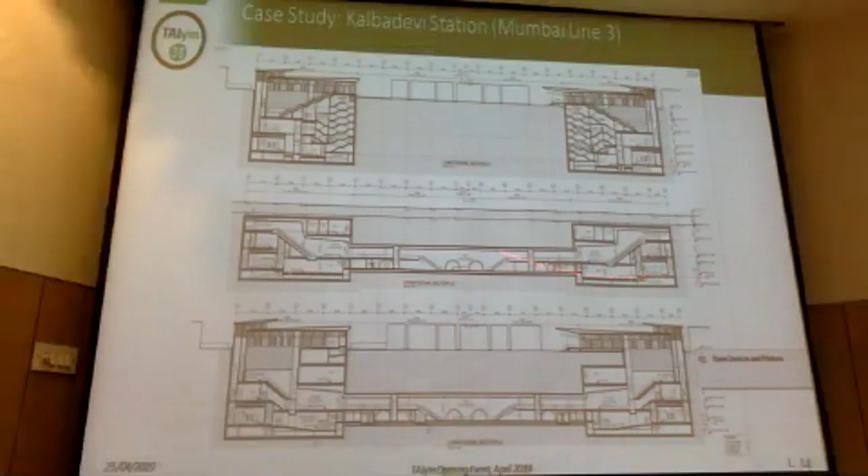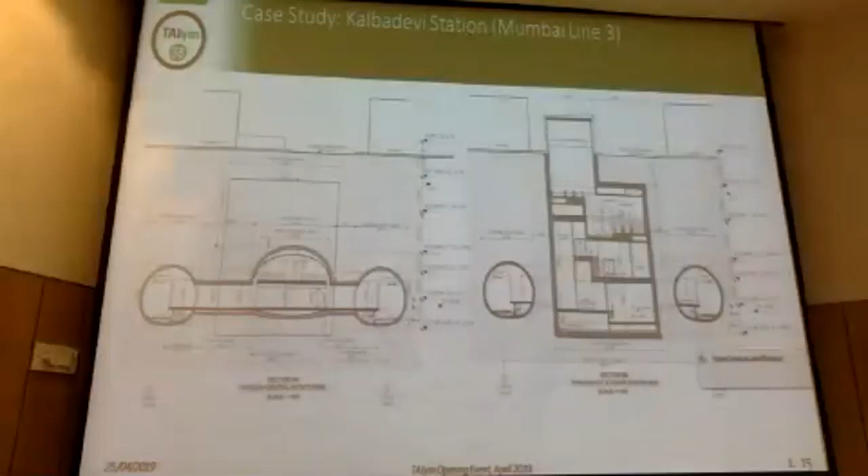As you can see, we have very less space in the underground for the services, so later we had modified this section. So this is the kind of section we have with the cut and cover box, the intermediate levels, and the central connection. This tunnel basically is a 10-meter high tunnel, and it was very high, and we had a lot of difficulty - our structure team had a lot of difficulty planning for this. So we had to modify it later and bring it down to the size of these.